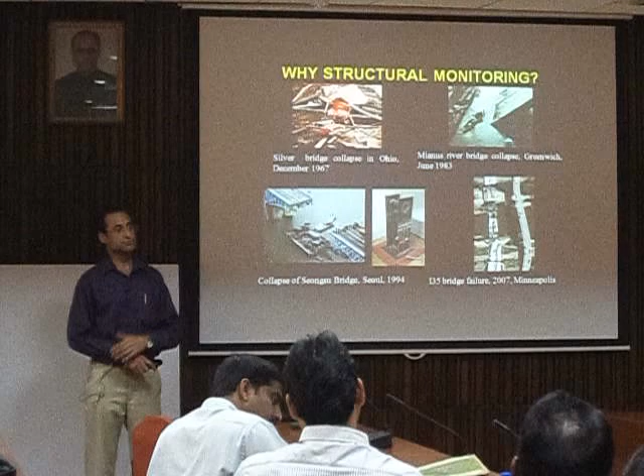In civil engineering domains, structural health monitoring has already evolved as a very important part, especially in the research community. Now everyone is very much concerned that we should do health monitoring, because whenever a structure fails, we come to know that it could have been avoided. There are numerous examples where structures are still running, and people have identified that they have some vulnerable components.

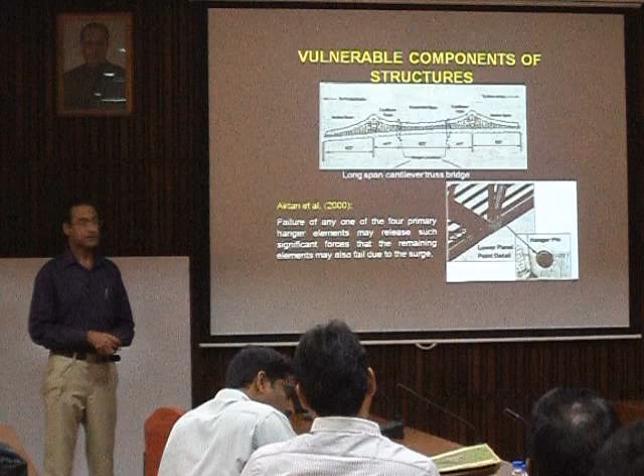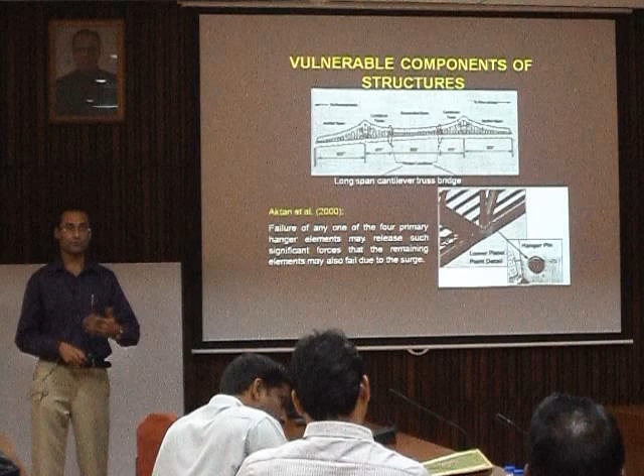For example, Aktan has given this example of bridges where we have a cantilever span holding a suspended span in between, and essentially the entire load from the suspended span to the cantilever ones is transferred by four hanger pins. So they assume a very important and critical role, and if any of them gives away, this may lead to disaster.

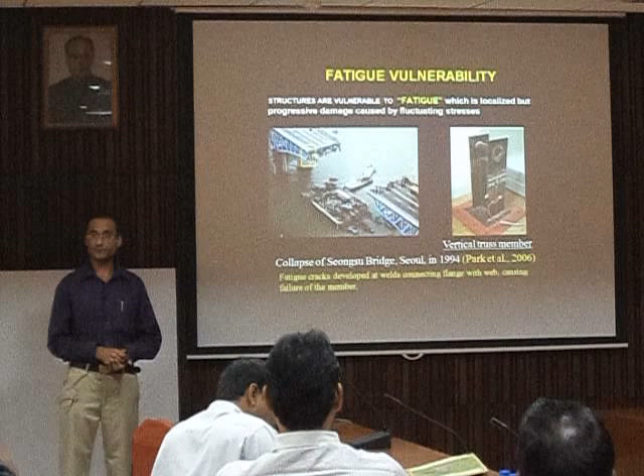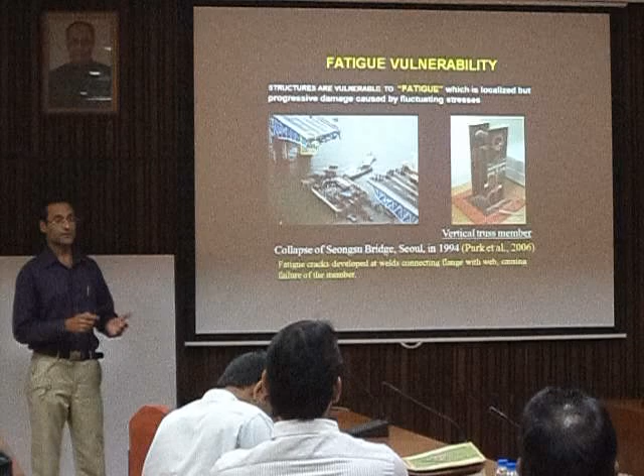Similarly, we have the problem of vulnerability to fatigue. Fatigue is essentially when, even if the magnitude of the stresses is not very large, their fluctuating nature is very detrimental to the structure. One more thing of concern is determinate structures, especially where we have no redundancy, so their monitoring is of more significance.

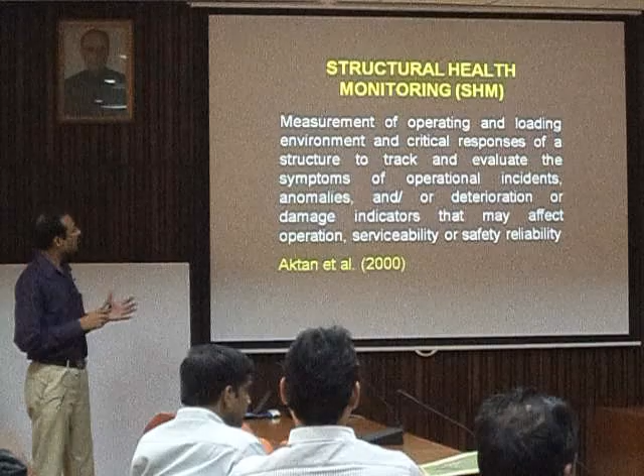The definition of structural health monitoring by Aktan is that it involves measurement of operating and loading environment, to track the symptoms of operational incidents, anomalies, and deterioration or damage indicators that may affect the operation, serviceability, or safety reliability. These are the principal things involved in structural health monitoring. This definition is from the point of view of civil engineering structures, but it can be well extended to other types of structures also.

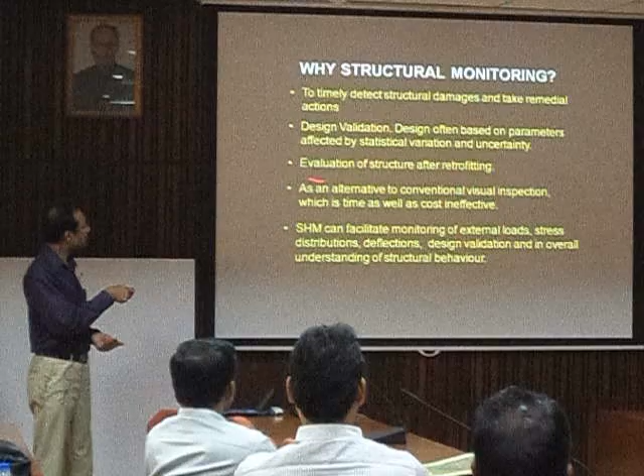So why do we emphasize structural health monitoring, especially for civil structures? These are the obvious reasons: so that we are able to detect structural damages in proper time and take remedial actions. We as civil engineers do a lot of design, but we seldom do validation. This is also very important, we should do that. The evaluation of structures after retrofitting is very common now; we do a lot of retrofitting of civil engineering structures, so we must do measurements to validate that.

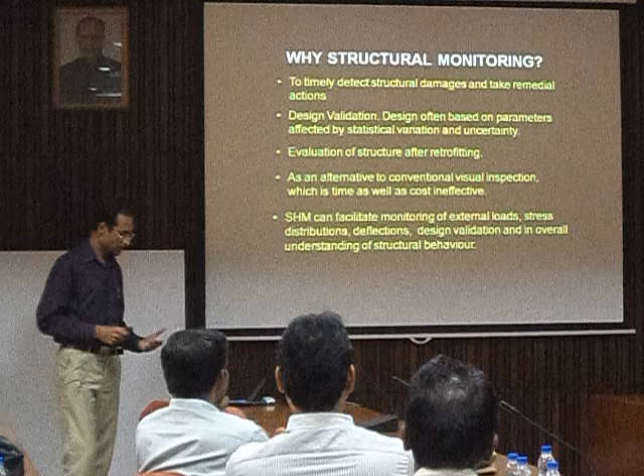And of course, the conventional approach of visual inspection is not going to be that much effective. If we have these kinds of measurements in our civil structures especially, then we can have a lot of data which will be of great value to structural engineers.

Now here I would focus on health monitoring, especially for fatigue life assessment using piezo sensors, and especially here we are using the electromechanical impedance technique. Piezoelectric materials are smart materials because they show stimulus response characteristics. We apply stress, and what we get is the development of charges. Conversely, if we apply an electric field, we find that they undergo deformation, and by this converse effect, we can make the structure excite also if we bond the piezo patch to it.

Now how does this technique work? It essentially involves the principle of vibrations, so it makes the structure vibrate. The only difference from the global vibration techniques, which are the conventional health monitoring techniques for bridges, is that here the frequencies employed are very large, in the kilohertz range. And because high frequency is deployed, the sensitivity of the technique comes out to be very good, typically comparable to that of ultrasonic techniques.

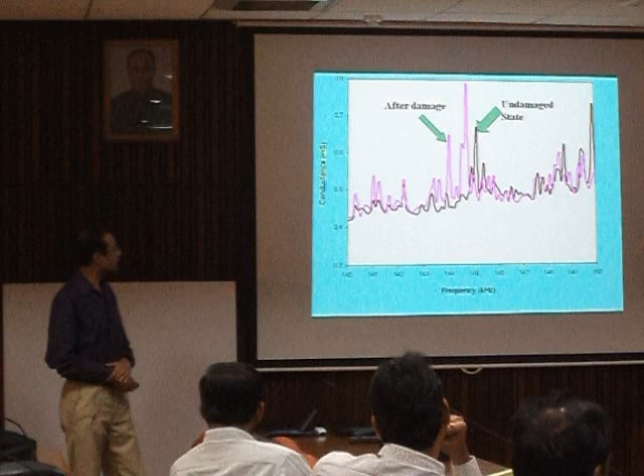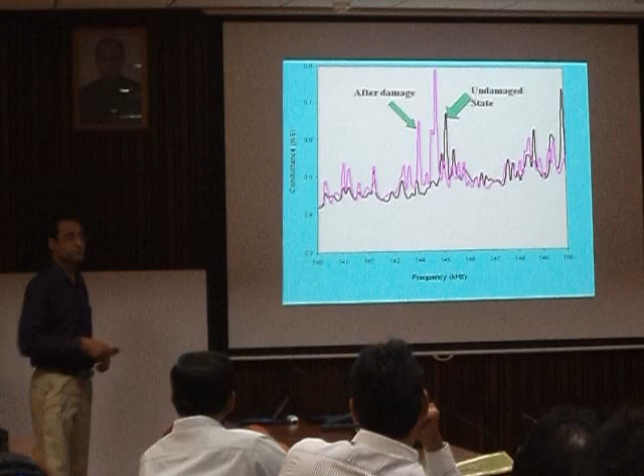Now the sensitivity is quite high. We have acquired the signature of the structure in the frequency range, this is from 140 to 150 kilohertz, and if there is any damage to the structure, the signature gets changed in a very recognizable form.

We have done extensive experiments in the last decade, starting from 2001 to 2004. This technique came to be applied on reinforced concrete structures, and our group was one of the first few to apply the technique on large reinforced concrete structures like bridges. The first experiment showed that typically the technique can detect cracks much before they become visible to the naked eye. So here we put the piezo patches, and they could detect the cracks in form of the shift of the signature before they were visible.

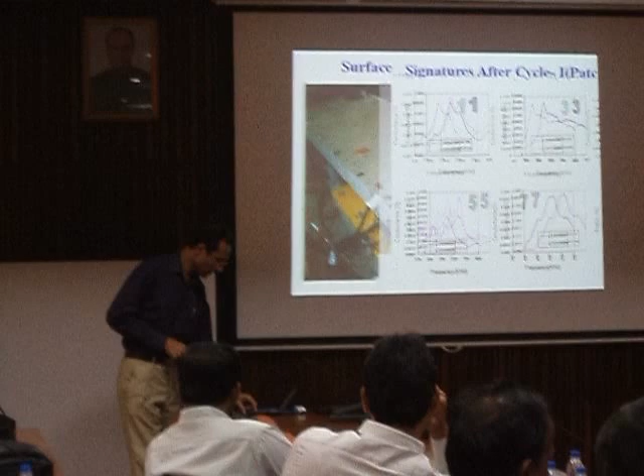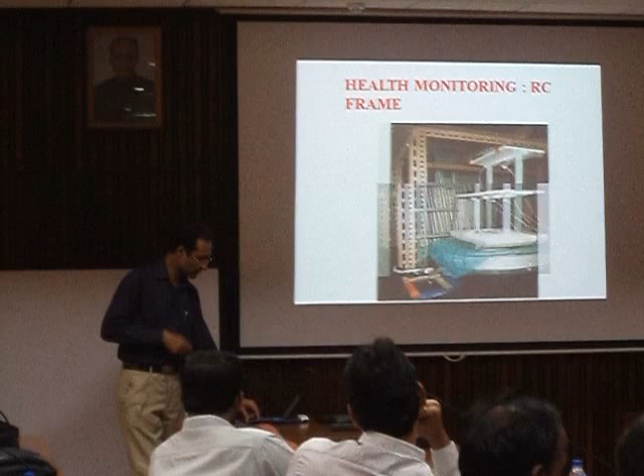So I am not going in too much detail, but similar observations we could get from model studies on frames, reinforced concrete frames. Concrete is a very troublesome composite material. So here we could capture the occurrence of damage much prior to by other means. For example, here you can see that the signature started changing, and the cracks were visible at stage number 6 of the loading, whereas the piezo patch provided a much earlier warning.

So these and other studies have further motivated research, and typically here what we measure is the inverse of the electrical impedance, that is admittance. So admittance is the main function which we plot as a function of frequency.

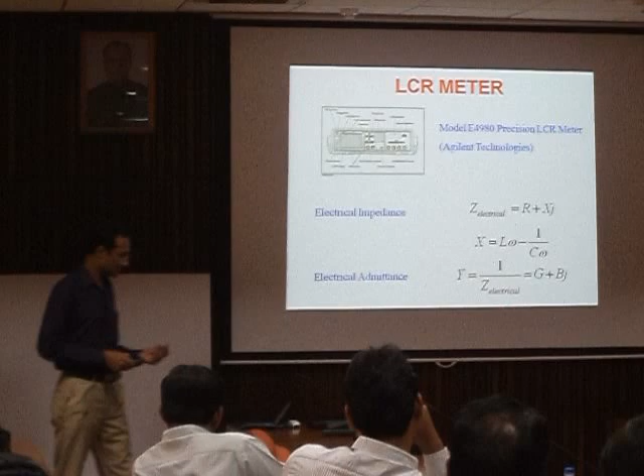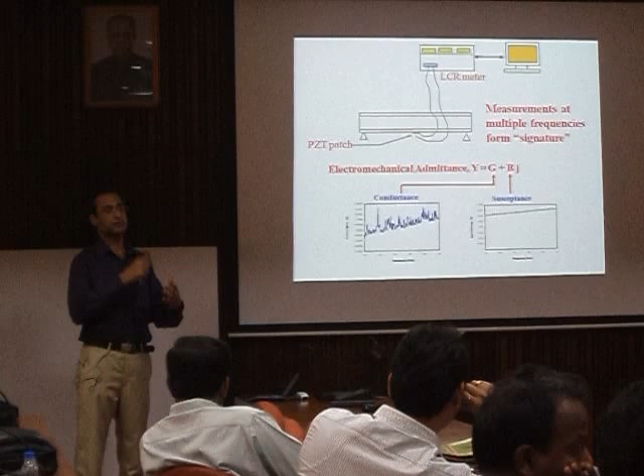It typically has two components: one is the real part and the other is the imaginary part. The real part gives a very obvious reflection of the dynamic characteristics of the structure, and the imaginary part is typically used for sensor diagnostics, because when we are using a sensor for health monitoring, the stresses are also transmitted to the sensor, and it's also possible that the sensor may have some kind of debonding, or deterioration, or it may break. So these diagnostics are provided by the imaginary part.

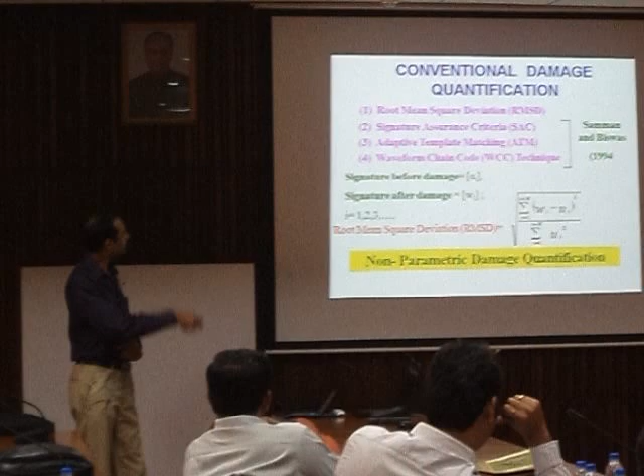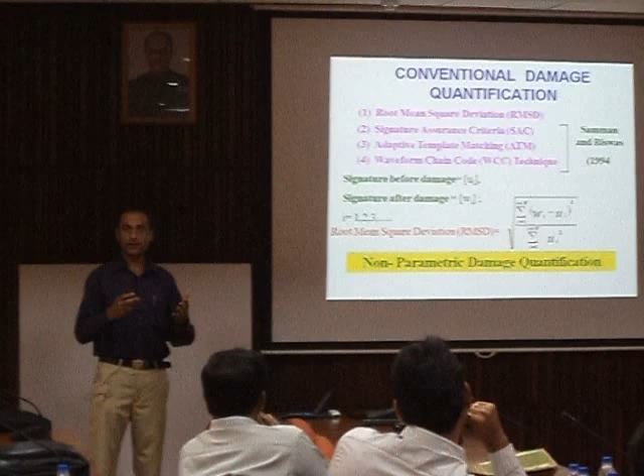In conventional EMI technique, typically the quantification of damage was not very rigorous, or not very based on the dynamic characteristics, dynamic parameters. It was rather based on the statistical variation of the signature.

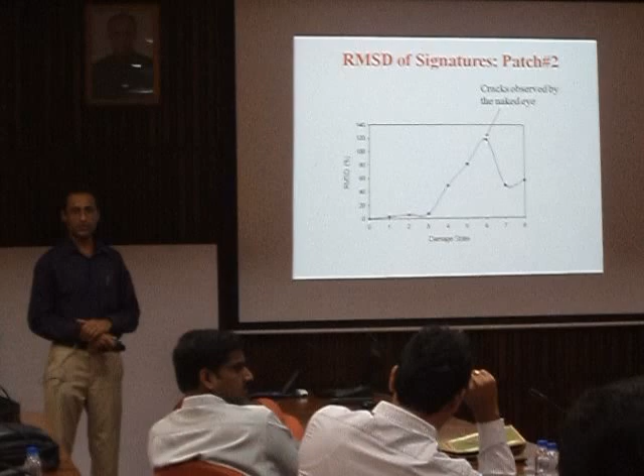For example, in the structure which I have just shown concerning the frame, this is how the root mean square deviation of the signature goes. So it provides some kind of indication, but it does not quantitatively tell us how much is the change in the stiffness or how much is the loss of stiffness. So this value, the root mean square deviation, can vary from patch to patch, from structure to structure. So there is no fixed scale. This was the main problem.

Now this problem can be very easily addressed if we follow the mechanical impedance approach. So here we do quantification not based on the raw signature but on the parameters derived from the signature. Now these are some of the earlier models, because here we have to use some kind of model to obtain the mechanical impedance parameter.

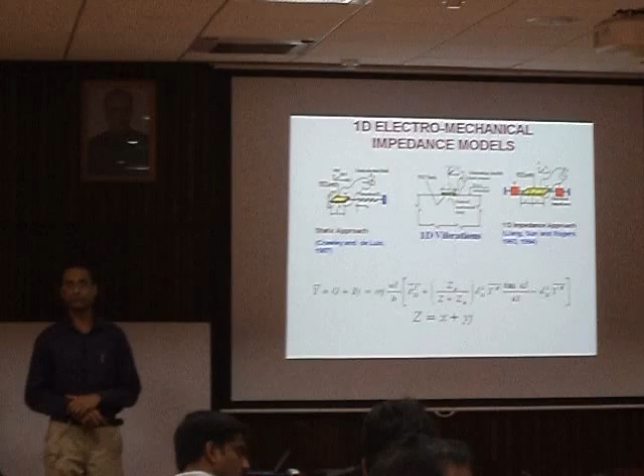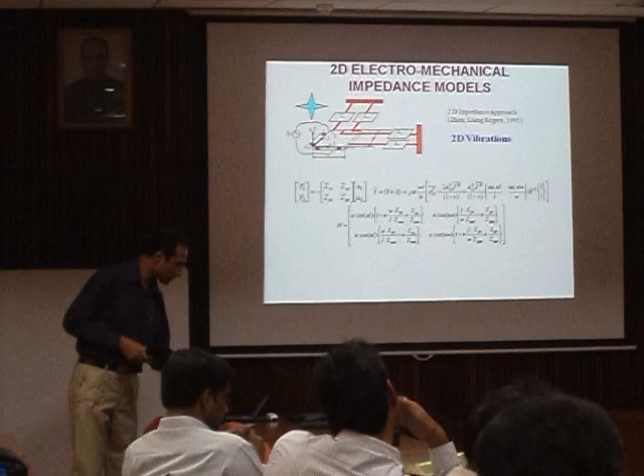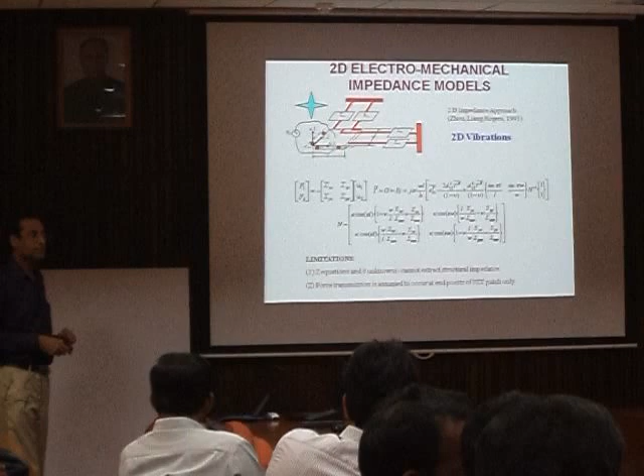So the earlier models were the static approach, then Liang's model came in 1994. Liang proposed a 1D model, and subsequent colleagues came up with a 2D model also. So essentially the interaction of the piezo patch in a real structure is two-dimensional in nature. But in the 2D models, the problem was that if we want to extract the mechanical impedance of the structure, then the equation does not give us the opportunity to do so.

So I addressed this problem in 2004, and we came out with a new impedance approach where a single term sort of represented the two-dimensional interaction between the patch and the structure. So now this equation is suitable. We just do our required manipulation and we can obtain the mechanical impedance of the structure.

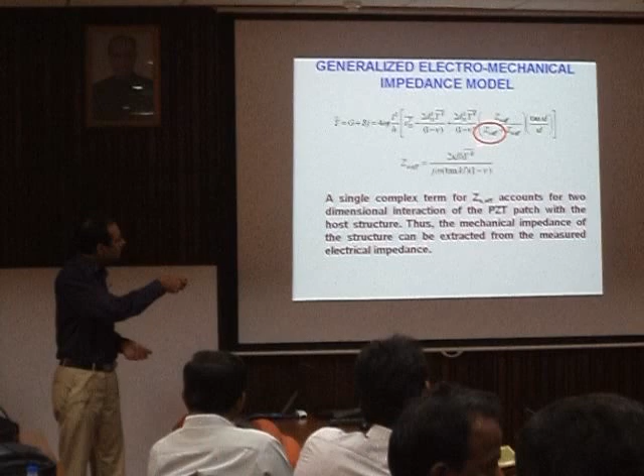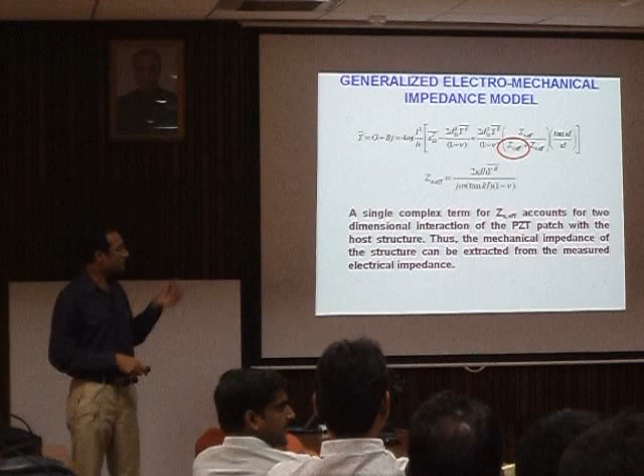So here we have the quantity which we are measuring, in fact is the admittance, and this is related to the mechanical impedance of the structure. So mechanical impedance is the main thing, just like the dynamic stiffness, and if we can obtain that, we can get better information about the structure.

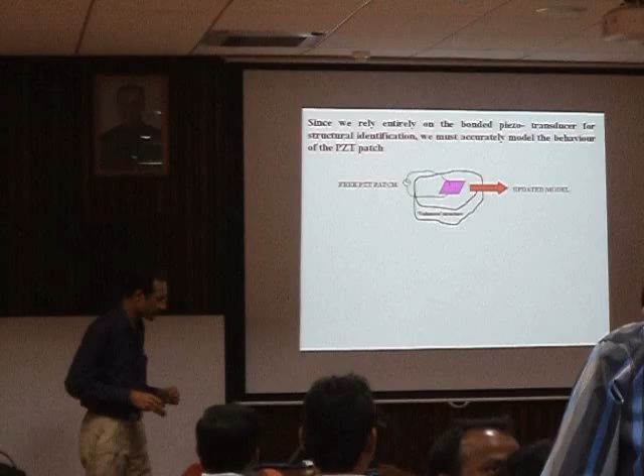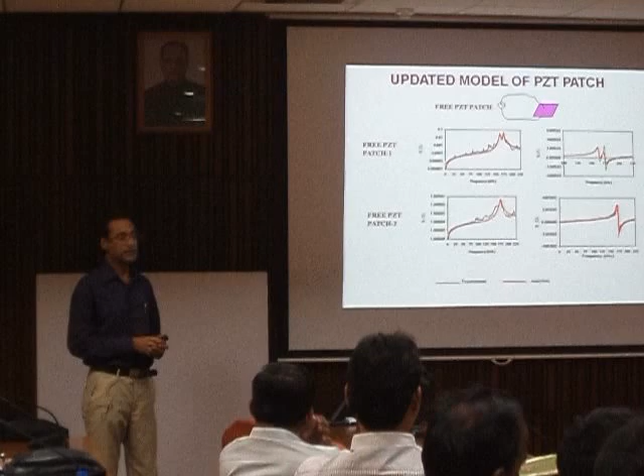So what we propose is that before bonding the patch on the structure, we first obtain its signature in free form and update its model, then bond it on the structure and use it for health monitoring. This improved the performance of the technique because we're using a better model for our patch. So the data we get from the patch isn't just relying on the model provided by the manufacturer, but our own model, and this gives us a better quantity to measure.

Now, how these two parameters vary provided us very interesting insight. If we compare with very simple combinations of basic elements, stiffness, the spring, the damper, and the mass, they follow a certain trend of variation of the real and imaginary parts. To our surprise, when we checked how the mechanical impedance extracted from a structure varied, the real and imaginary parts were conforming to one of these basic setups.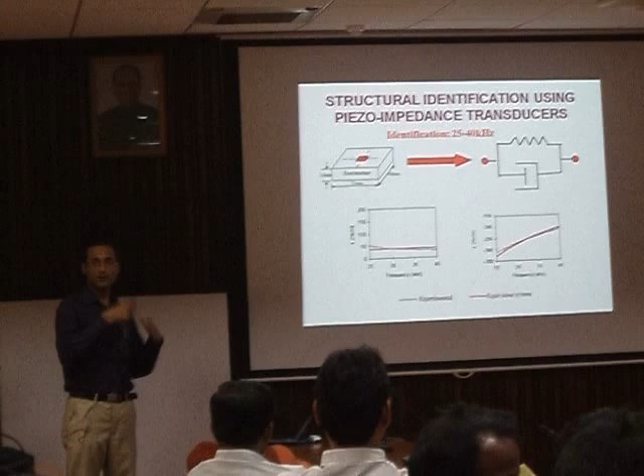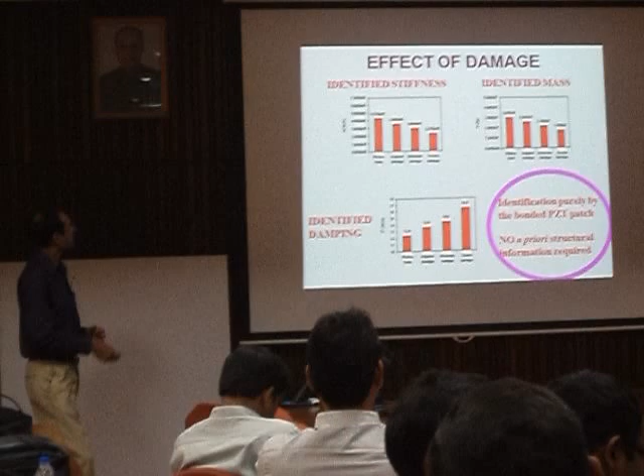For example, this was an aluminum block, and within this frequency range, we found from experimental measurements that the behavior was just like a spring-damper system. So we were wondering what these two parameters mean. Are these absolute values, or what happens with damage? With damage, we found a very perfect correlation: when damage is happening on the structure, these parameters accordingly change. The identified stiffness is going down, mass is going down, and the damping is going up.

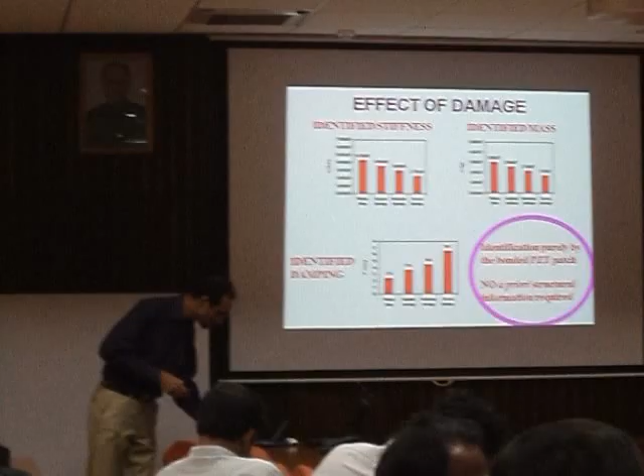But what is the correlation between these parameters and the actual parameters of the structure? That was the next question. So here I demonstrate with the help of a recent study, a joint project between IIT Delhi and University of Technology, Sweden.

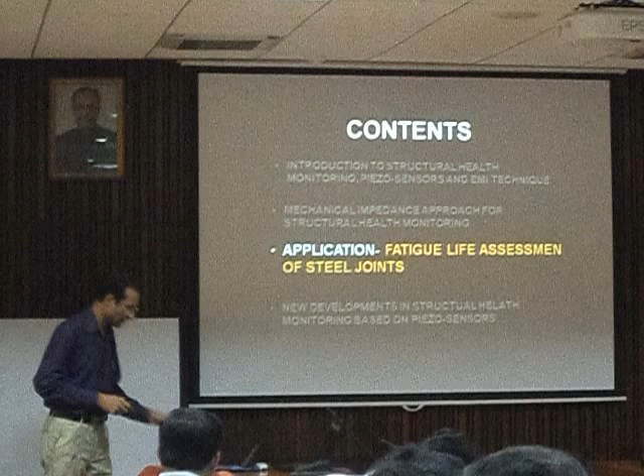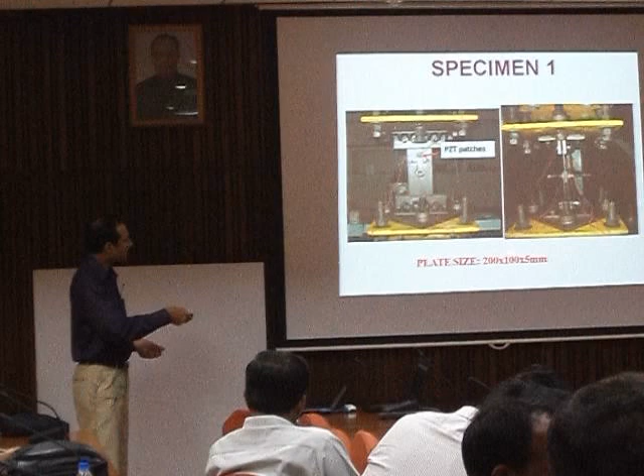We started with a few specimens of typical prototype joints. These are double lap specimens, with plate sizes typically 200 by 100 by 5 mm, and these specimens were subjected to fatigue loading. We bonded in each specimen 3 piezo patches in the same configuration, with a total of 3 specimens. So we have one plate being monitored here, and two plates on the other side.

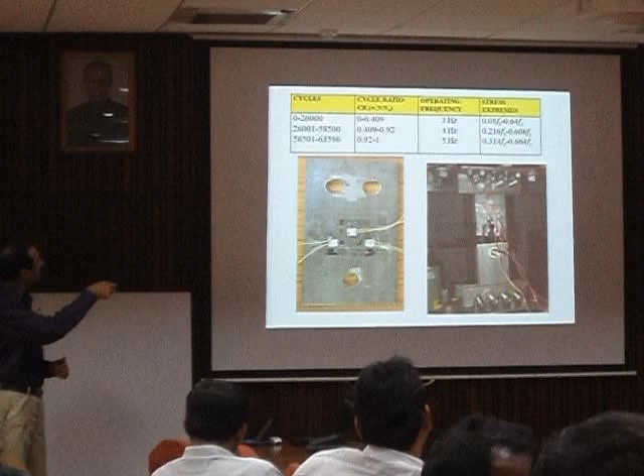Now this table shows the loading history. We kept the stress values from 0.08 times the yield stress to 60% of the yield stress, and the specimen failed at close to 63,000 cycles, and this is the failure mode.

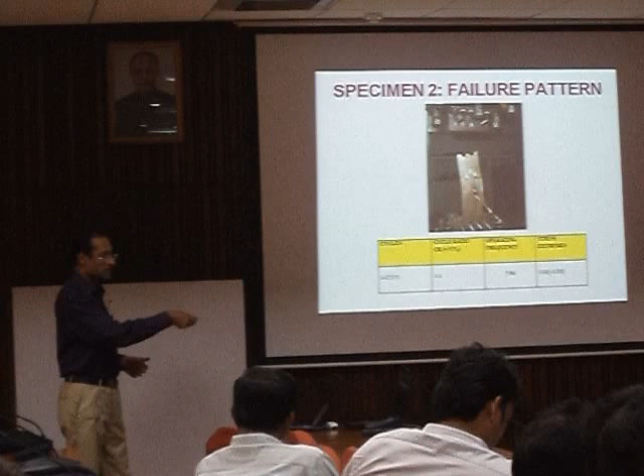Now this is the second specimen. The configuration is more or less similar, except that we reduced the thickness slightly by 1 millimeter so that we could go higher on the stress value. We could increase the stress value to 0.88 times the yield stress. And then this is the third one.

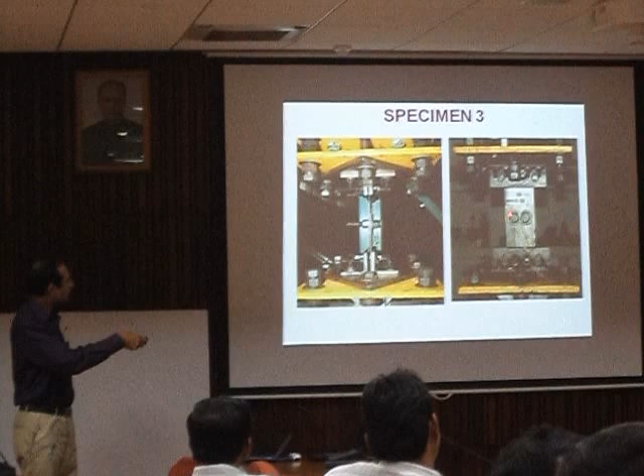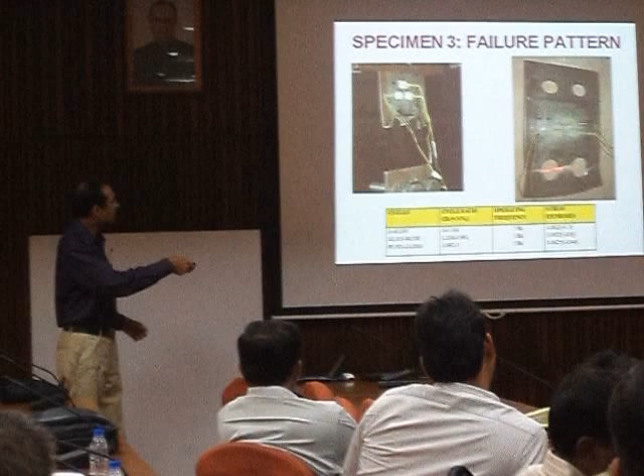Here we have essentially the same configuration, and here we could go up to 130,000 cycles, with stress values typically over 90% of the yield stress. And here we get the failure plane exactly at the force location, and these are the three piezo patches.

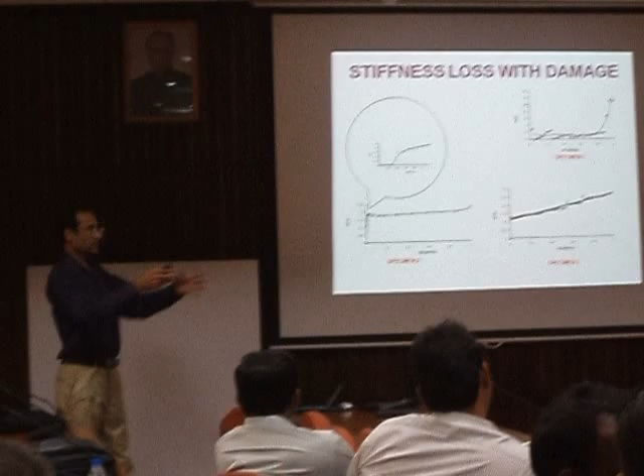We monitored the stiffness loss also during the experimentation, because we get the load versus deformation data. From there we could monitor how the stiffness loss was happening.

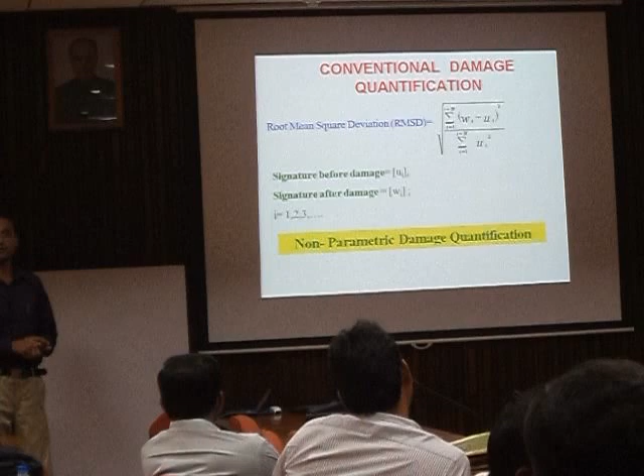Now if we do conventional damage quantification by means of root mean square deviation of the signature, we are at a disadvantage. For example, we have a total of 9 piezo patches. If we see this kind of plot with increasing cycles, we don't get any well-defined correlation. For example, if we see the magnitude, these 3 piezo patches were on the same specimen, but they are giving different magnitudes, and here we see a lot of scatter in the data.

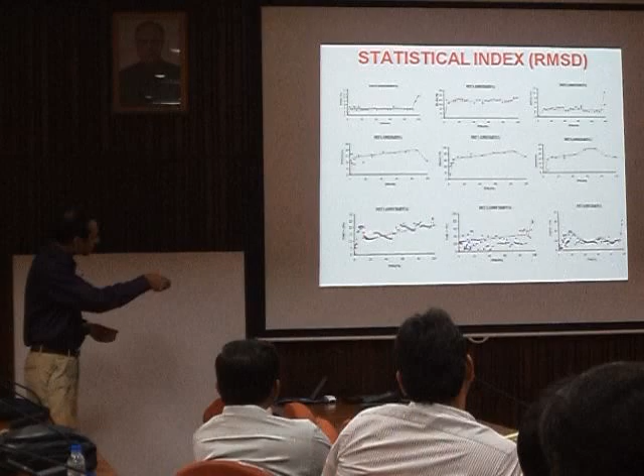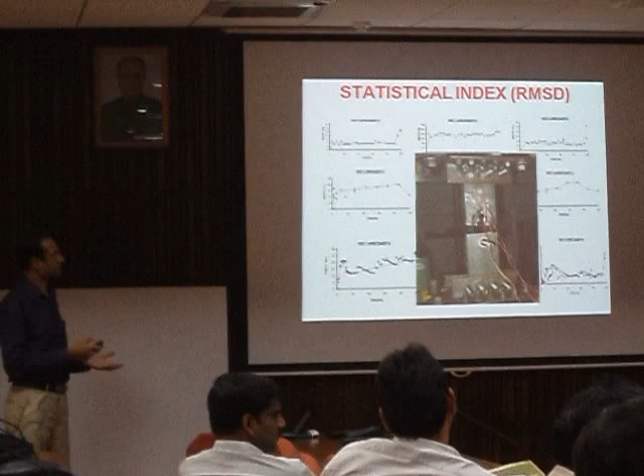Now just for the first specimen itself, patches 1, 2 and 3 are shown here: 1 is at the top, 2 and 3 are at the bottom. So 2 and 3 are at the same distance from the failure plane, however the magnitudes are starkly different. This prompted us to go for the mechanical impedance approach rather than this one.

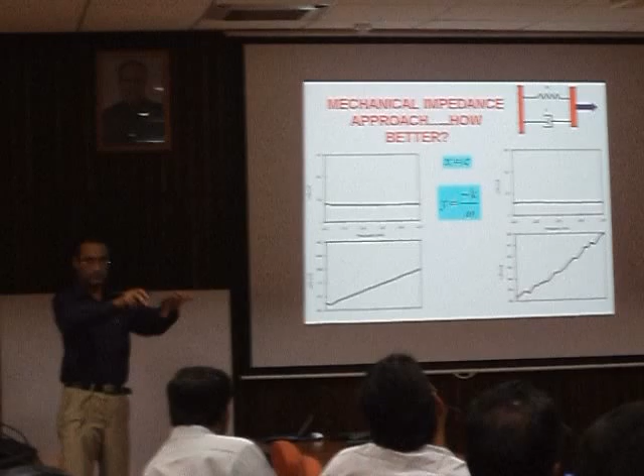And piezo patches identified the structure as a parallel combination of spring and damper system. This is an experimental observation, because we can see here that the real part which we get from the sensors has identified this system for the structure. The real part is constant and the imaginary part is negative, going like this. So this is characteristic of this kind of system.

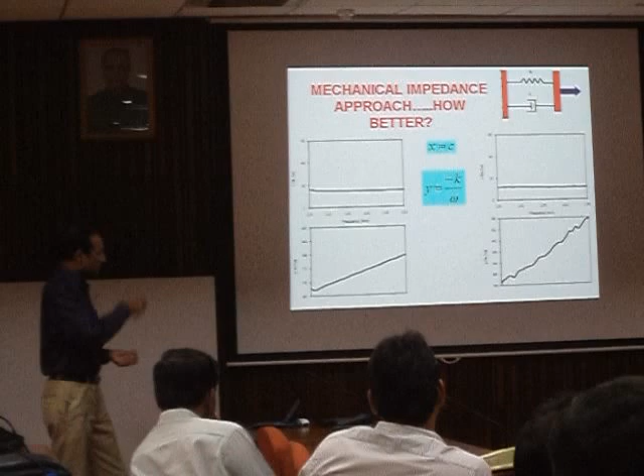And one very important observation came here. What we have done is plot the inverse of the frequency against the imaginary part. And what we can see here is that the slope of this is basically a measure of the identified stiffness.

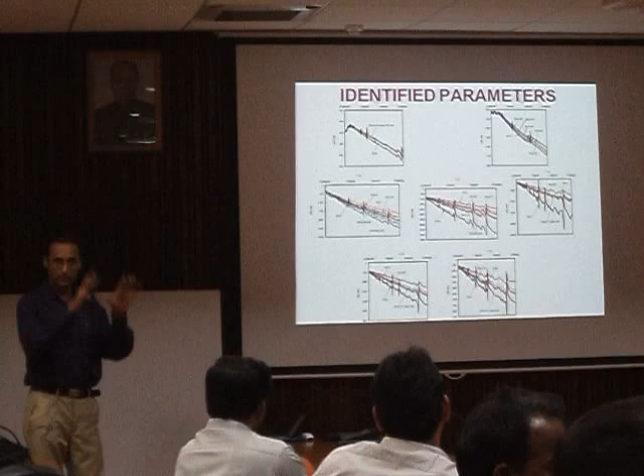It's a very clear observation that as the cycles increase, the stiffness identified by the piezo patches goes down. This is not the absolute stiffness, but the stiffness identified by the piezo patches. Here we have rejected two piezo patches, from the first specimen and the last specimen, because they did not fit the diagnostics. The diagnostics suggested a possible case of debonding, so their data was rejected. Based on all other piezo patches, the observation is very consistent.

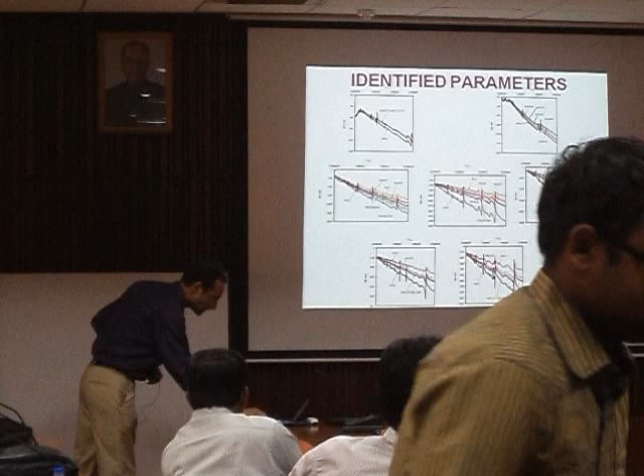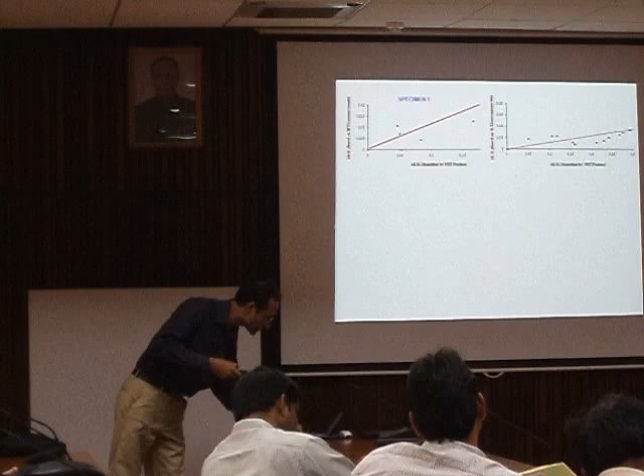To find how the stiffness loss measured by the piezo patch correlates with the actual stiffness, we plotted data for three specimens. For the first specimen we had less data, for the second we increased the data, and for the third we deliberately increased the data more. We found a reasonably quite acceptable correlation between the stiffness identified by the piezo patch and the absolute stiffness of the specimen.

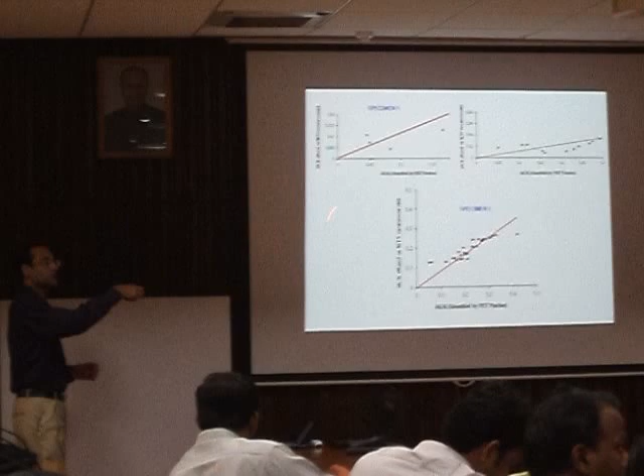This shows that if we want to use piezo patches and not bother measuring the absolute stiffness, we can still get something very meaningful directly from the piezo patches.

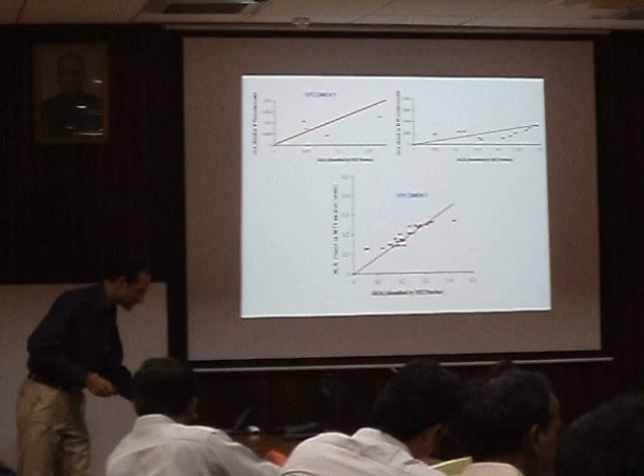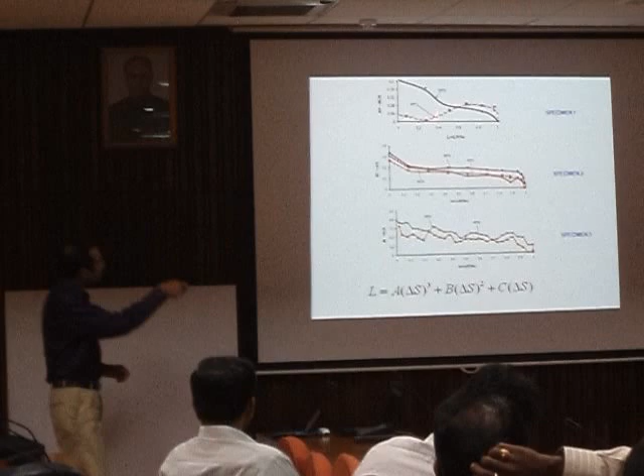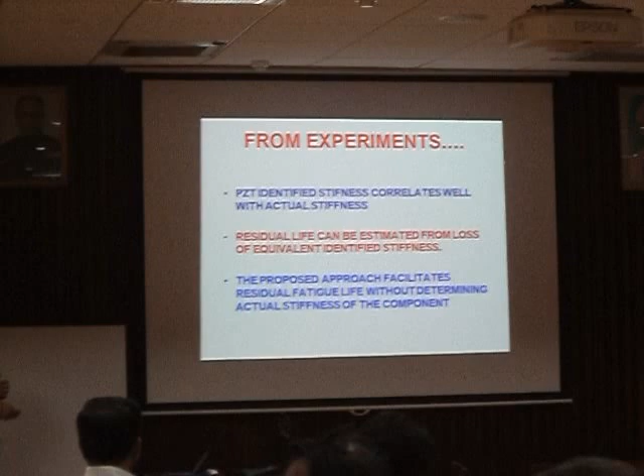So we quantified in a non-dimensional form the stiffness loss. Here this is not the absolute stiffness but the piezo identified stiffness, and the correlation plots came in a very narrow band, with the exception of one of the piezo patches. We could very easily write a regression equation for these three specimens. From here we learn that the piezo identified stiffness correlates very well with the actual stiffness, and the residual fatigue life can be quantified by this kind of calibration.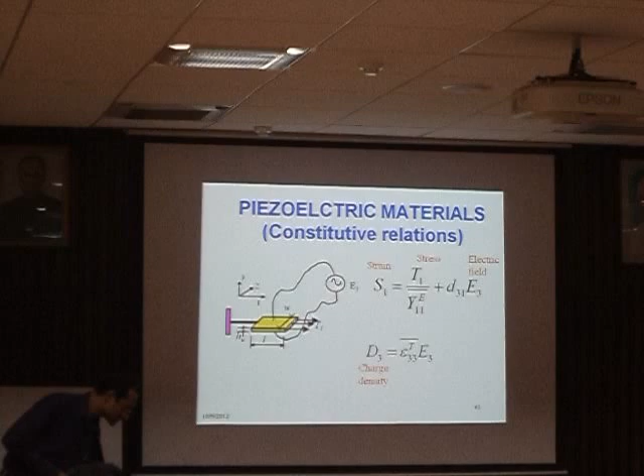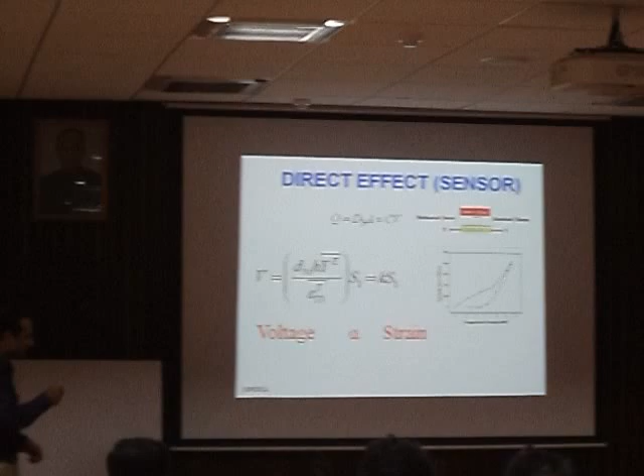If there is no electric field applied from outside, the equation becomes very simple, and we can put it in this form: the voltage output across the piezo patch is directly proportional to strain. Here we are getting a sensitivity of something around 200 millivolts per microstrain.

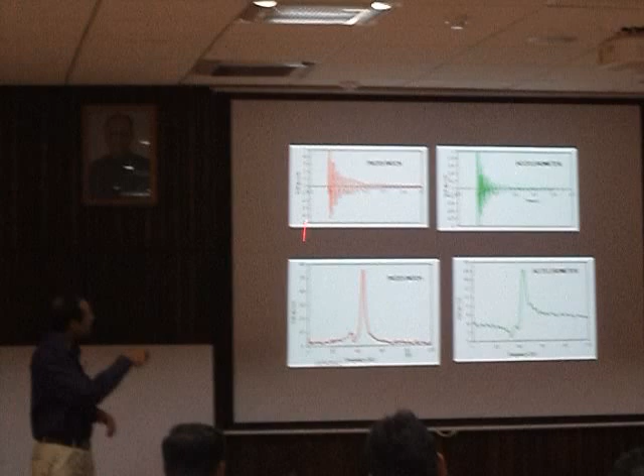From the comparison of three sensors, here we have the plot from the piezo patch compared to the accelerometer. The piezo patch and accelerometer measure different quantities, one measures strain, the other acceleration, but if we are working in the frequency domain, they can both serve the same purpose.

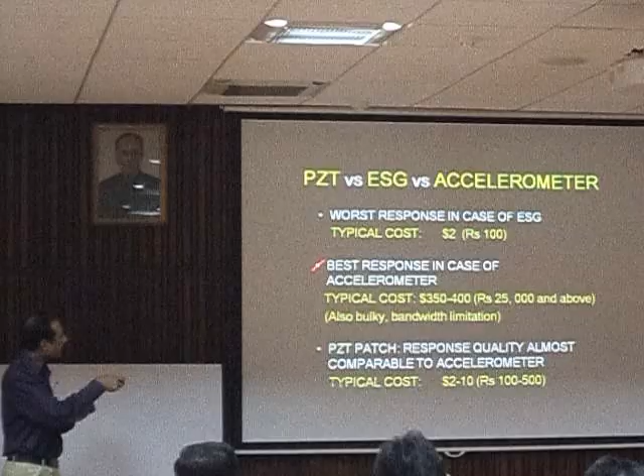What we find from this comparison is that if I give 100 marks to the accelerometer, the response from the piezo patch will get at least 95 marks. But from the cost point of view, the piezo patches offer very strict competition to accelerometers.

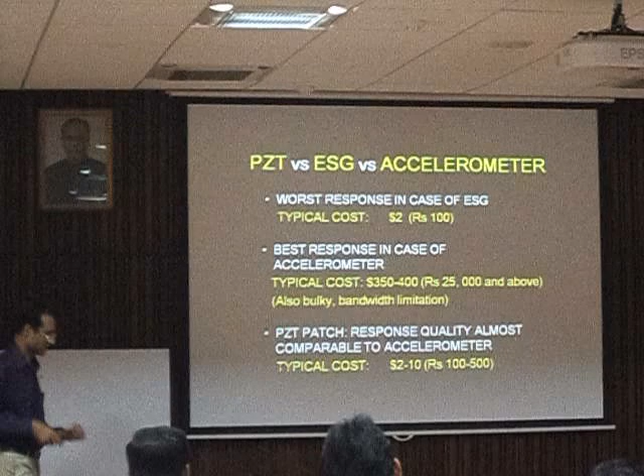How can we replace accelerometers in totality? For example, for health monitoring, if we want the piezo patches in this coupled form -- here I am not talking about the EMI technique which I described previously, I am just talking about the global vibration technique.

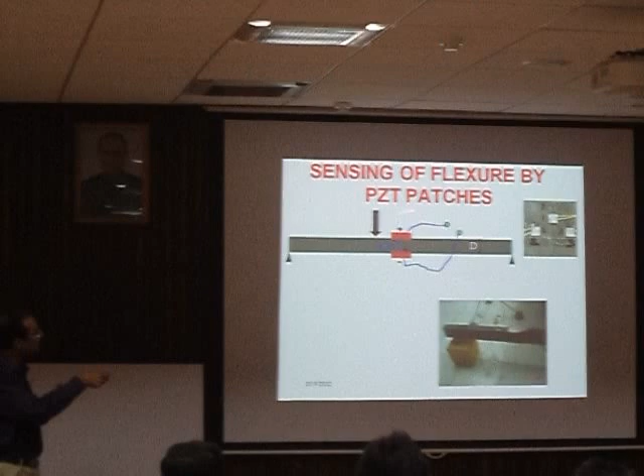If the member is under flexure and we have this kind of coupling between the patches, the voltage output we get from the combined coupling is basically a measure of the curvature, because the combined voltage will be proportional to the sum of the strains, top and bottom. We don't need very expensive equipment for this measurement, and this can serve as a health parameter.

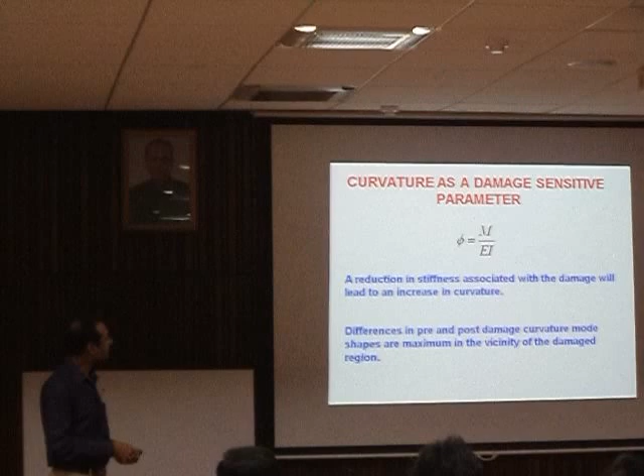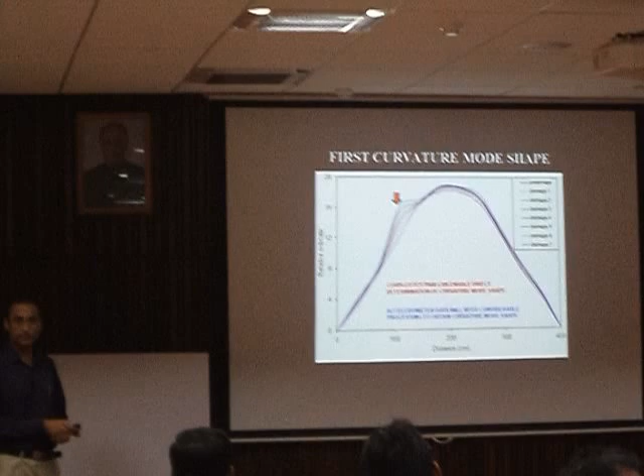I am not going into much detail, but I just want to highlight that a coupled piezo pair can also enable the same sort of damage detection capability which the accelerometer, which is very expensive, offers.

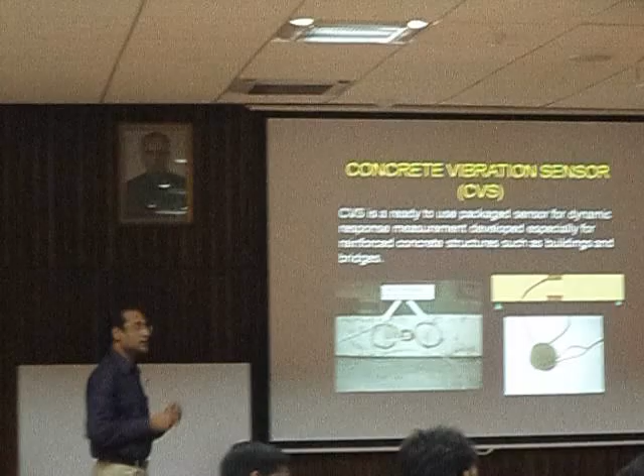We have also developed a variant of the piezo patch which can be embedded inside concrete structures. If we have this kind of embedded sensor, it can remain protected throughout the life of the structure and provide us a lot of data.

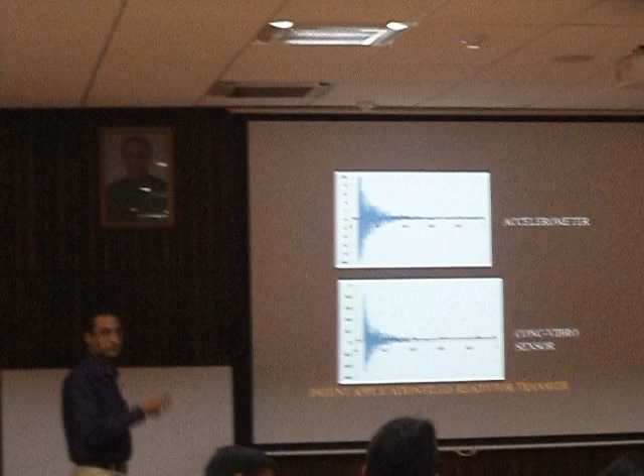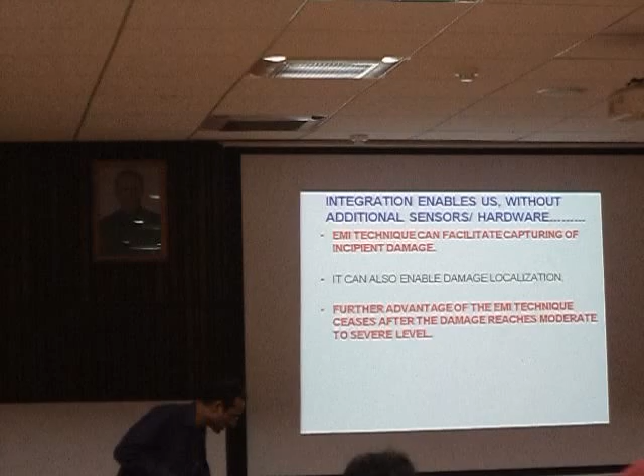This is the comparison between the accelerometer and the concrete vibration sensor based on the piezo patch. We have also developed a dynamic force sensor in our lab, which we have transferred to a company. If you integrate both the global and the local EMI technique, this offers a lot of advantages -- the combined system can be much better because it captures the advantages of both.

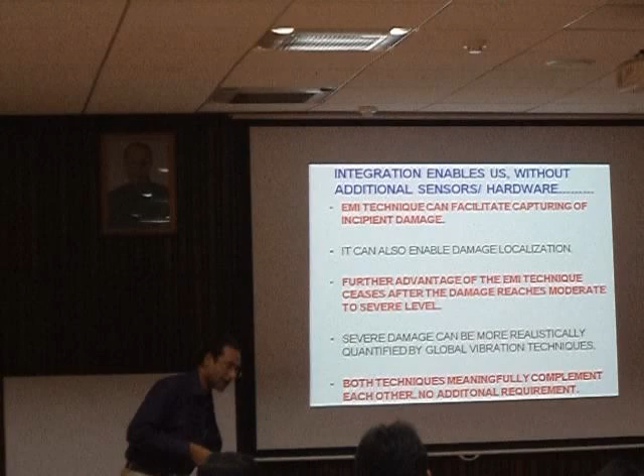And then there are a few low-cost adaptations of the EMI technique which we have also worked on. In fact...

Dr. Suresh, I'm afraid your time is up.

So okay, I just jump to conclusions. Please.